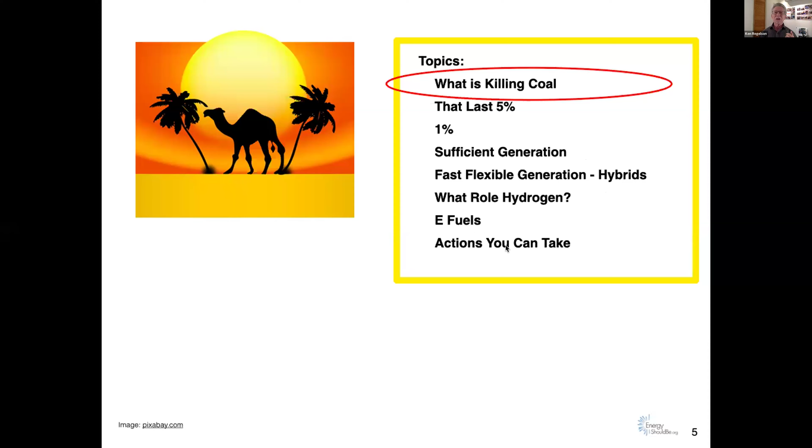Now, when I first started working full-time in renewables in 2001, coal was king, gas was queen, and honestly, 10% solar and wind electricity seemed practically impossible. Every now and again, somebody would say, oh, hey, when we get to be 100% renewables, and there'd be a long pause, and then everybody would laugh. That was 2001. In 2012, I created Energy Should Be to get the word out to people, to move people forward, and to look at this analysis question. And I put together a video that turns out to be our third most watched video. There's more than 12,000 views of this video. It's 3 minutes long, to allow lots of renewables. Baseload coal and nuclear must go.

Problem is, baseload power plants run like this. Renewables are like this. And if you're trying to back up something that's going like this with something that goes like this, it doesn't work.

It's now 2024, and coal is being killed by electricity markets where there's actual competition amongst generators, and lower cost combined cycle gas, and lower cost renewable electricity, and the fact that the price of gas went down, although it's probably not low right now.

So let's talk a little bit more about coal, nuclear, and to a lesser extent, combined cycle gas. Combined cycle gas is a gas plant that runs a little bit like a coal and nuclear power plant, but not quite as slow. So they don't work well with renewables. I already talked about that. We'll talk a little bit more about that later.

They have a high minimum run. That means you can't turn them down to way low. If zero is the baseline, you can only turn them down maybe to 50% or maybe even 60% of their full capacity. They aren't very flexible. They can move a little bit, but they can't move a lot, and they can't move quickly.

In the case of coal and nuclear, it's 3 or 4 days of start time. It takes a long time for them to get going and a long time to shut down. In the case of a combined cycle gas plant, it's a slow start. It might take 12 hours or more to get up to speed after generation.

Coal and nuclear are very high capital costs. And what's more, it's not just that - they're very high cost unless they're run most of the time. If they're running at 80 or 90% of the year, then they're not so bad. Part of that's capital costs, the cost of building them, and the cost that we pay off to Xcel for running them. If you don't have lots and lots of megawatt hours in the year, a way of measuring electricity, you're spreading out this big cost over a small number. That makes that cost higher.

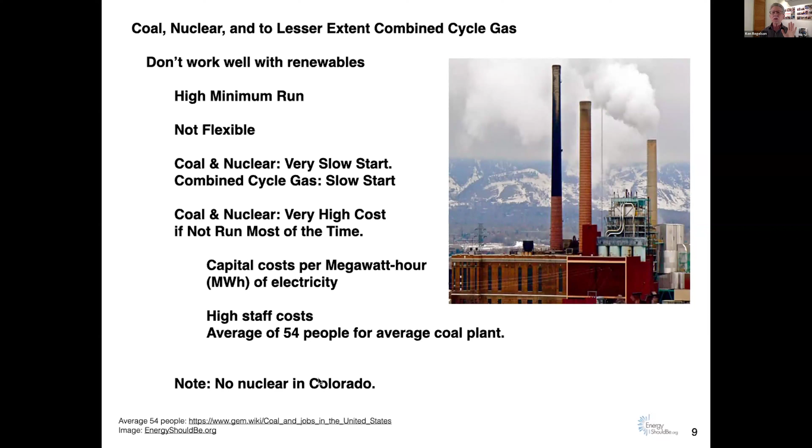This is really critical, and it doesn't just apply to coal and nuclear. It applies to combined cycle plants - if you don't run them a lot, they're not cost effective, although with combined cycle you might need only 1 or 2 staff people to run them. But it might also apply to geothermal, very high upfront cost and not very good at moving up and down, or small modular nuclear reactors might have the same issue.

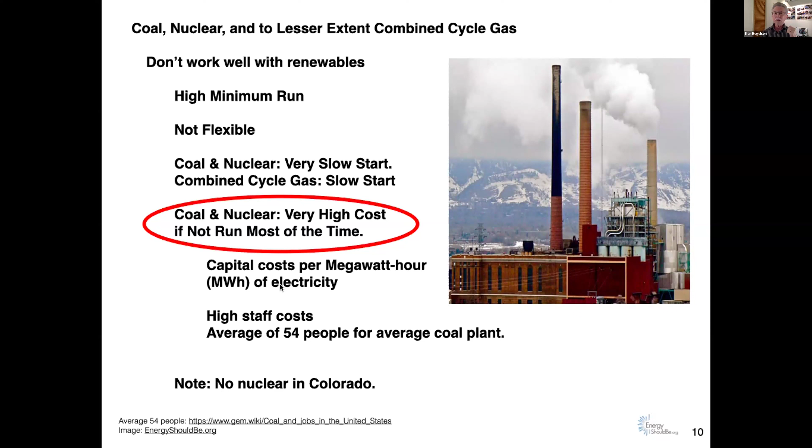Ask me questions at the end for more detail.

With apologies to W.C. Fields, the actor - he actually said what the world really needs is a cheap 5-cent cigar. Well, I don't smoke and don't believe in it, but hey, I get the point. What the world really needs, this is me saying, is a good, cheap, medium start, somewhat flexible and reliable generator.

Let's talk about above 95%. Now, these slides are from a talk I gave, I think maybe even to Power Our Future in 2019, and it talks about what happens when we model lots of reliability and how we get above this level.

So first, the story that goes behind this. Now, dark calms - what are those? That's when there's no sun and there's no wind, or little sun and little wind. And we want to be able to have electricity at okay cost. So we took actual data from Platte River Power Authority. That's an electric utility that serves 4 northern Colorado cities with generation and transmission.

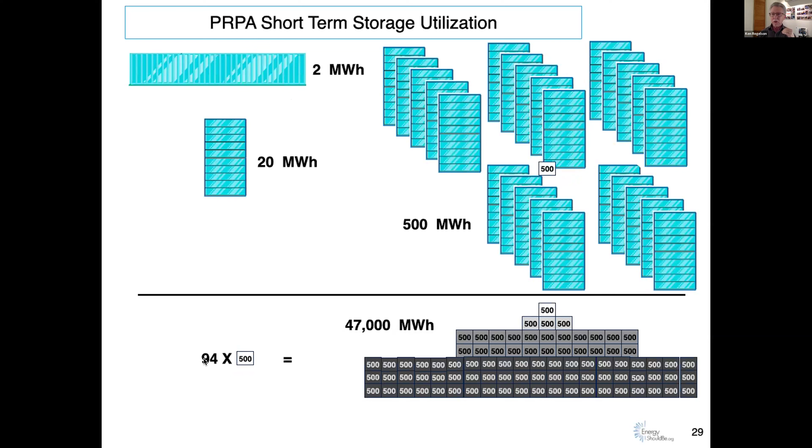Here is a storage container, a shipping container. It turns out if you take a shipping container and fill it full of batteries, right now you get about 2 megawatt hours. It's going up, maybe it'll get to 3 or 4 at some point in time. There's 2 megawatt hours, there's 20 megawatt hours, there's 500 megawatt hours. Okay, imagine this times 94, and I think you start to see the problem with this.

What about 1%? What is 1%? 1% of a year is about 100 hours. For those of you that are literal, it's a little less than that, about 4 days. 1%, well, that's the distance from here to here.

99% to 100% renewables. Form Energy's definition of long duration storage, interestingly, is 100 hours, 1%. And they did that by getting lots of utility data and figuring out how much storage you really need to have very high levels of renewables.

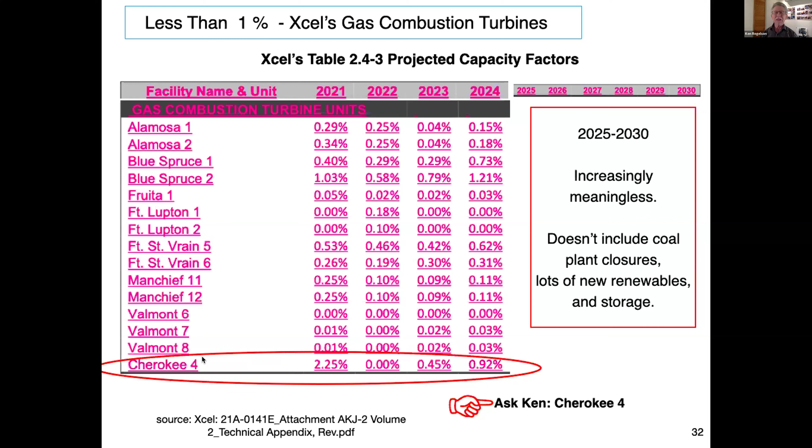There was one other little point. There's one of these that doesn't belong - Cherokee 4 is not a combustion turbine. Well, sort of. It's a long story, if you have a question about it, ask me at the end. It's kind of an interesting story, I think, but I'm a geek. What can you say?

Okay, so we know what 1% is about, but something we don't want is this: renewables and storage push fossils to 1% and less. Even if you're at 80%, you're heading down a different level, 17% down, and then you add a little more storage, a little more demand management, some more renewables, maybe markets help you out, you're going to be getting closer and closer to 1% not renewable.

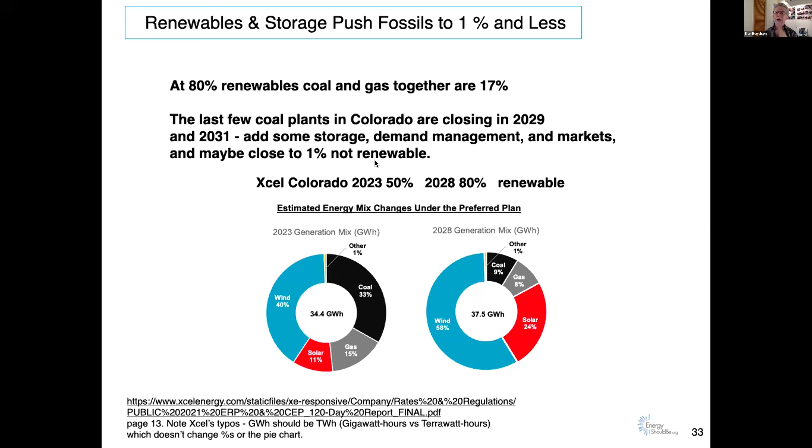What about another side of 1%? A 100-hour blackout is not acceptable, particularly if it happens during a 110-degree heat wave or a minus 10 degree cold snap. Picture the last several days in Colorado with no heat, no light, and if we electrify it, no transportation. People die, and our economy literally stops. You can't buy anything during a blackout. Everything relies on electricity. That's not acceptable. Maybe an hour is acceptable, but not 100 hours.

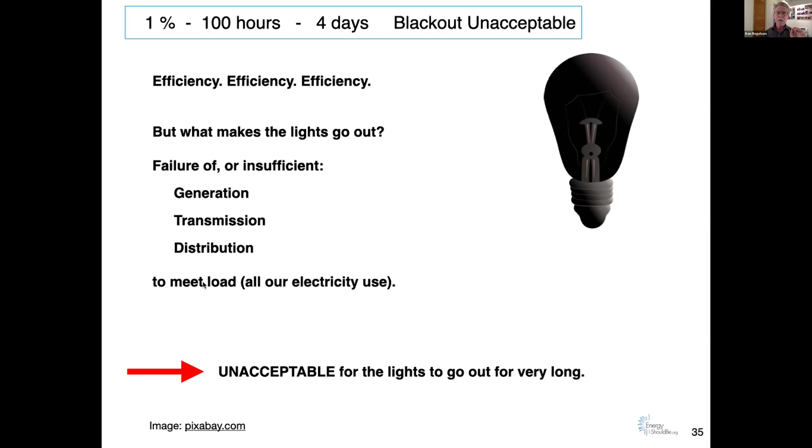So how are we going to fix that? Efficiency, efficiency, efficiency - I've said it, I've mentioned this in every talk, and people say why don't you talk more about efficiency? Absolutely, efficiency. What makes the lights go out from the generation side, from the grid side? It's failure, like a mechanical failure, or insufficient planning for generation, transmission, and distribution to meet our load. Load is all the ways that we use electricity at this moment - that's the electricity load. And I'm mostly going to talk about generation.

So let's talk about sufficient generation. These next two slides are actually from a talk I created back in 2012. Enough generation to keep the lights on 99.99% - that's 1 hour blackout plus 20%. And that's because if you're an electric utility, your neighbor may fail and you need to be able to help them. That's part of the way that we get to this lower level, 99.99%. Up until recently, as I said before, that meant baseload - coal, nuclear, gas for running like baseload or sort of like baseload, like a combined cycle, and peaking gas.

And that looks like this. This is, by the way, actual data from 2010 for Boulder, Colorado. This shows a fair share of baseload coal, no nuclear in Colorado, and peaking natural gas to fill in. That's what it looked like in 2010.

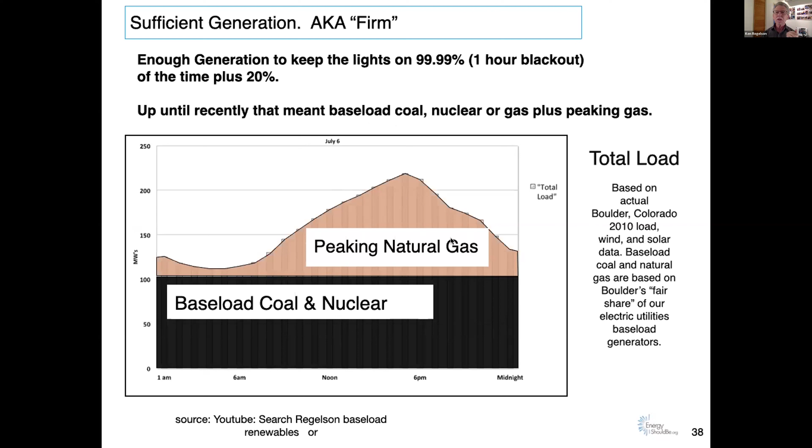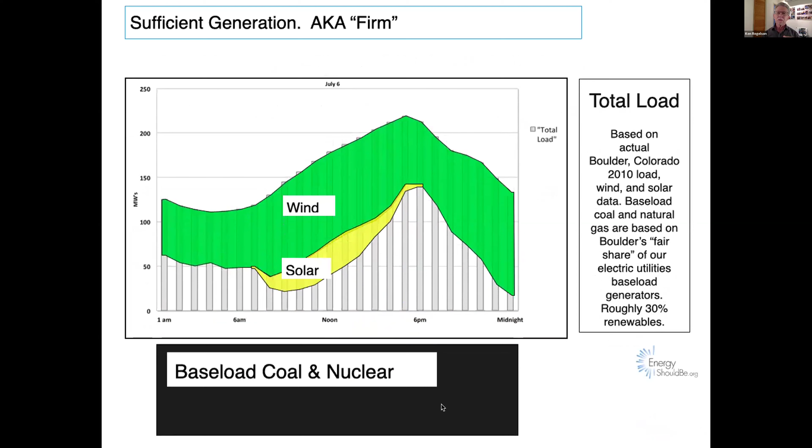But if we add wind and solar to even just 30%, never mind 50%, the wind looks like this, the solar might look like this. There's no place for a big rectangle. If you try to put in baseload coal and nuclear, it just doesn't work. You have to go to something that's very nimble, going up and down, like a peaking gas plant.

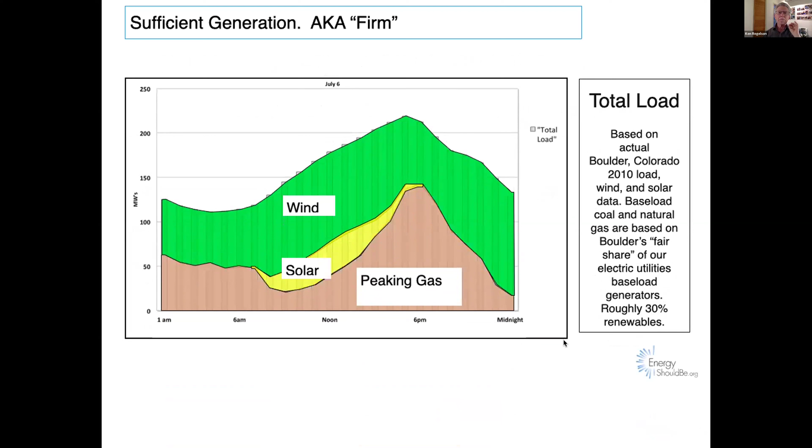Okay, I think very soon, sufficient generation is going to mean for utilities: renewables everywhere, storage everywhere, distributed energy resources down in our buildings, on our homes and businesses, solar storage and load management so we can turn down the load when we don't need to use it, so we can keep air conditioning and heating running, and transportation. Virtual power plants - these are all great things and they are coming. Managed electric vehicle charging, and part of that could be V2G, where not just charging the vehicle, but the vehicle helps support the grid by exporting electricity to the grid, and continued backup support from neighboring utilities, maybe through larger market areas.

And even with all of that, we may still be faced with a 1% shortfall. Two choices: we can ignore it and say 1% fossil's okay, or maybe we can do something else, and maybe there's some things we can learn about doing something else. That's the rest of this talk, most of the rest of this talk.

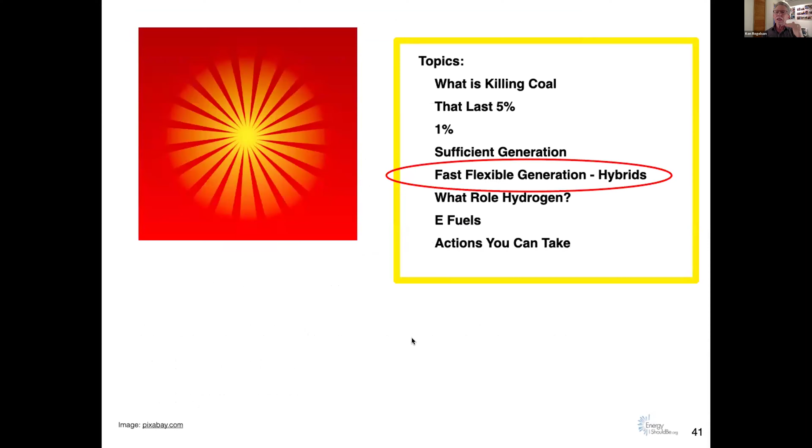Okay, one of the things we can do is to take things that are less efficient than they could be and make them more efficient with flexible generation and hybrids. Platte River Power Authority, Northern Colorado - their plan is to get to 88% renewables by 2030.

Not as much as we might like, but it's still a good big step. They say they need a 200 megawatt, $240 million aeroderivative gas turbine. They're going to close their 280 megawatt coal plant, that's why they need this additional capacity, plus more wind and solar distributed energy resources. They want firm, fast, flexible, fast start, low minimum capacity replacement for the coal capacity, and by the way, highly efficient.

Okay, I agree with the first five. And I wonder why highly efficient matters as we move from 12, then down to 5, and then down to 1% non-renewables. Efficiency doesn't matter so much if you're just going to run it for 1% of the year.

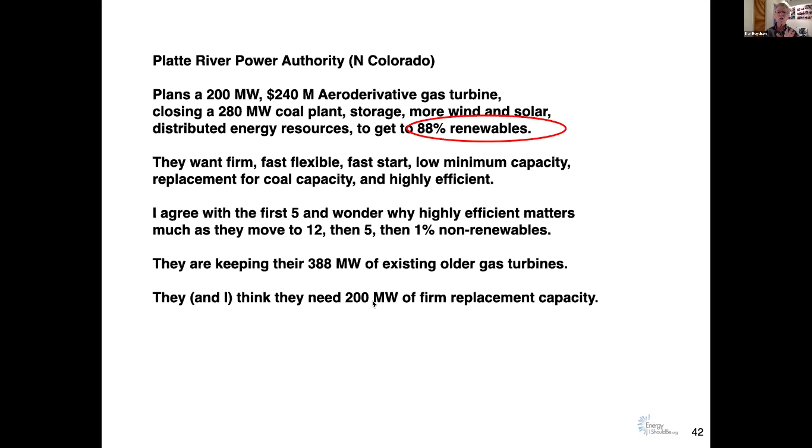They are keeping 388 megawatts of existing gas turbines. And I agree, they need 200 megawatts of firm capacity somehow. But there are lots of ways to get that, not just an aeroderivative turbine. Okay, firm, fast, flexible, fast start, low minimum capacity.

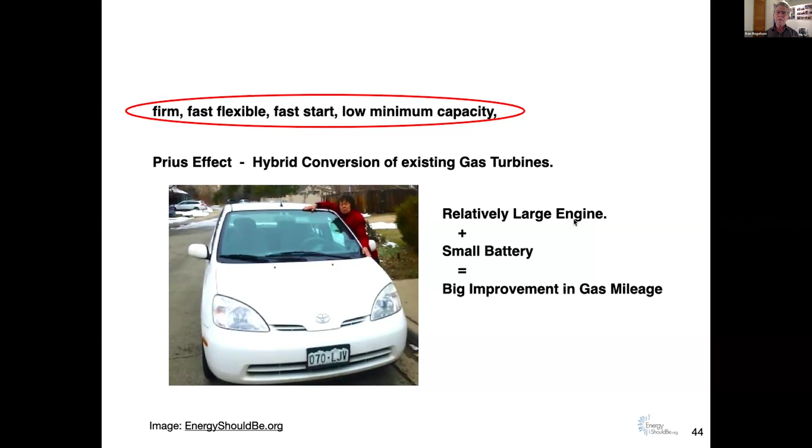Priuses. The Prius was an amazing innovation when it first came out back in 2000 or 2001. It has a relatively large gasoline engine in comparison to a very small battery. Actually, in comparison to bigger cars, it does not have as big a gas engine as them, but in comparison to the battery that's in it, that helps move the car—not the battery just for lights, but that actually helps move the car—it's a pretty small battery. And that got a big improvement in gas mileage and a big reduction in pollution.

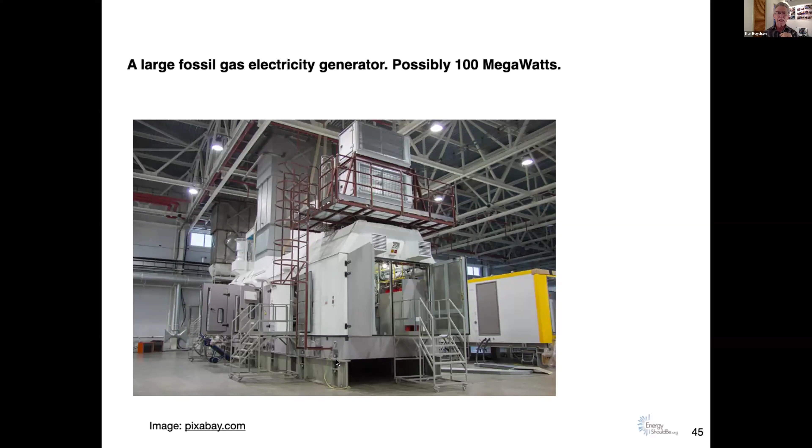What if we did that with this? This is probably maybe a 100 megawatt natural gas electricity generating turbine, a peaking unit, one that can vary very quickly. That's what it looks like. You can tell from the steps, it's not giant. That's a lot of generation in a pretty small space in comparison to, like, a coal-fired power plant.

Because you get firm, reliable, dispatchable better than the existing turbine. Okay, and why? Well, that's because you can run the turbine, or just the storage, or just the turbine, or you can run both at the same time, and you can switch on the fly. The battery gives it super fast and flexible capability. It's cheaper to maintain. Black start capability, that's something that a lot of power plants don't have, and with hybrid systems, you can add in black start pretty inexpensively. Spinning reserves with a lot less spin, and pretty inexpensive, $15 million for a 50 megawatt CT. That's a lot of money if it was me, but in utility speak, that's not much. Think of them as firm spinning reserves with 90% less spin.

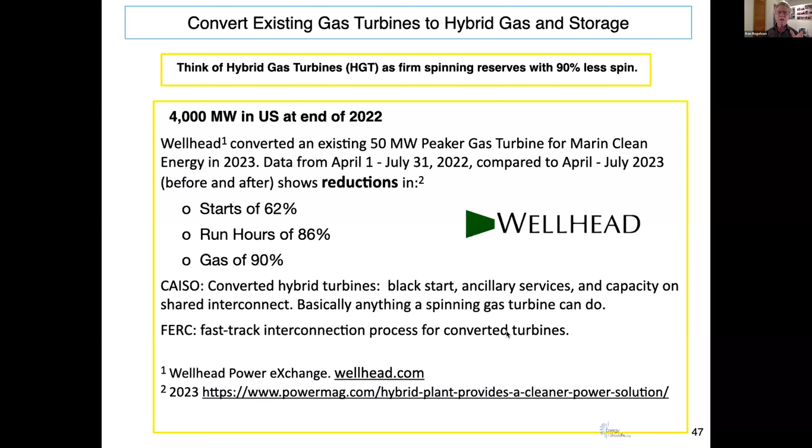CAISO is California's grid operator. They say—not just me saying this or Wellhead saying—they say that all these things, black start, ancillary services, capacity on a shared interconnect, anything a spinning gas turbine can do, these can do with very little spin. FERC, the Federal Energy Regulatory Commission, that regulates electric utilities on the US national level, said you can use a fast track interconnection process for converted turbines. These are available not just from Wellhead, they're available from GE and Mitsubishi as well.

There's a report. If you want the link, then Mary or I can get it to you. Just send an email, you'll have my address, you probably have Mary's already. That helps the more technical people understand really what's going on here. So we'll see about that for a little bit later. So, firm.

Okay, what role does hydrogen play? These slides are brand new, some of them literally from this morning. I wish I could say that I was more prepared all the time.

Why am I talking about this? Because a lot of people talk about hydrogen for aviation fuel. I don't think it's going to happen. Maybe I'm wrong. You tell me what you think after you see this.

Take the 787, nice modern jet, 250 passengers. Turns out it's not that hard to find out the passenger cabin volume: 16,000 cubic feet. If you took the entire passenger cabin and made it a big tank, it would be about 120,000 gallons. There's 5,000 feet in the cargo volume, and they use 34,000 gallons of jet fuel. They get filled up with that.

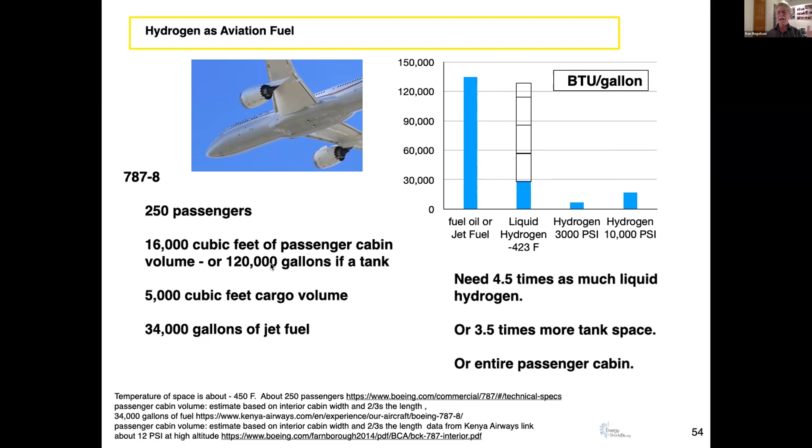It doesn't happen, not directly as hydrogen. That means to have the same amount of energy, you have to have 4.5 tanks the size of the 34,000 gallon tank, which is conveniently just about the entire passenger cabin. So if you want to fuel this plane with hydrogen the way it stands, no passengers, no problem. Well, maybe a little problem.

What about pipelines and storage? Let's talk about realistic uses, because I think there are some. It's these super cold liquids, like liquefied natural gas, that are really hard to cope with. You constantly have to cool them in order to keep them a liquid. They want to boil off, and that means you're losing that liquid. And we're talking about using it 1% of the year here, right? I'm sorry, I'm getting ahead of myself - this is for aviation. You can use a lot more than that.

Pipelines need 4.5 times the capacity, either pressure, diameter, or both. There are environmental issues - this is a study from the UK, there's a link down here, and the slides will be available to you too. That said, the leakage of hydrogen will increase the atmospheric lifetime of methane. We don't want that. Where is it good to be used for? Well, when it's being used to produce - using electricity as the fundamental, but make the hydrogen with electricity that's generated renewably - for steel, for making cement, or for making e-fuels, like maybe jet fuel.

This is a quote from Leslie: physics, including thermodynamics, always wins, but sadly, it never votes or gets elected. And that's why we're seeing so many people talk about hydrogen for things that are unrealistic for it.

Here's the rest of the aviation fuel alternatives. Anything below the red line is just too energy-undense. It's not dense enough to be replacing jet fuel in most jets as we think of them now. Maybe someday somebody will figure something different. LNG is a liquid fuel, and the tanks are just too heavy and expensive to make any sense. Make an e-jet fuel instead. Propane has its problems, and ethanol too. If you want to know, ask.

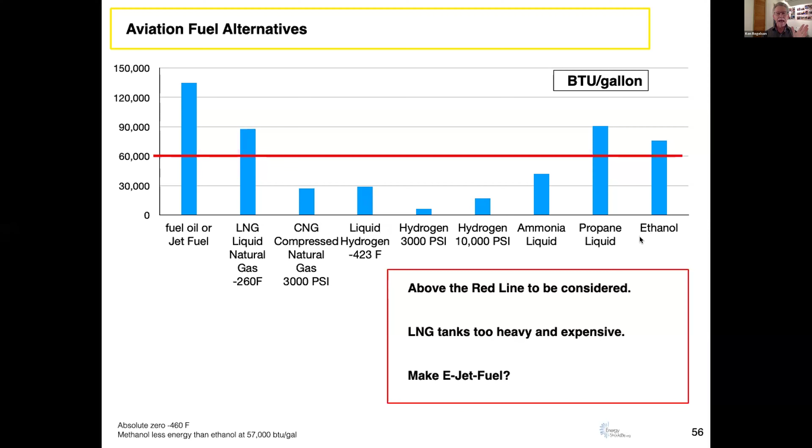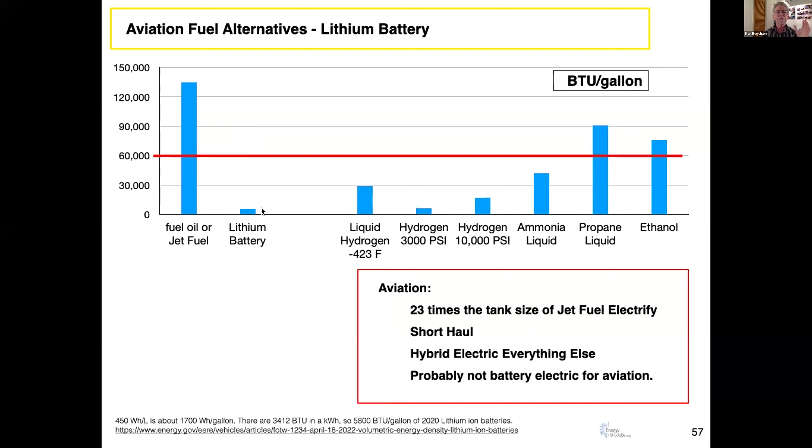Okay, what about if we used lithium batteries? Never mind the weight, just the volume of them, how much space they take up. Well, turns out it's about 5,000 BTUs per gallon - just a fraction of this. You have to have a tank that's 23 times as large as the tank that you would need to fuel an airplane this way.

I do think that for short haul airplanes, electricity will see use there. And I also think we should hybridize all the rest of the fleet eventually—it'll make a great deal of sense, just like it makes sense to hybridize a Prius.

Let's talk about 1% electricity fuel alternatives. These gas turbines, thousands of them worldwide, burn fossil gas mostly. Some burn fuel oil—remember, that's just like jet fuel. Many are dual fuel already, and almost all can be converted to dual fuel or just fuel oil, particularly if it's a renewable e-fuel, with minor modification. Tank size doesn't matter quite as much.

So that's not an issue. But even so, if you have a 100 megawatt gas turbine, that's going to burn 500,000 to about 1 million gallons of fuel in 100 hours, or 1%. And Colorado might need 50 to 100 of these.

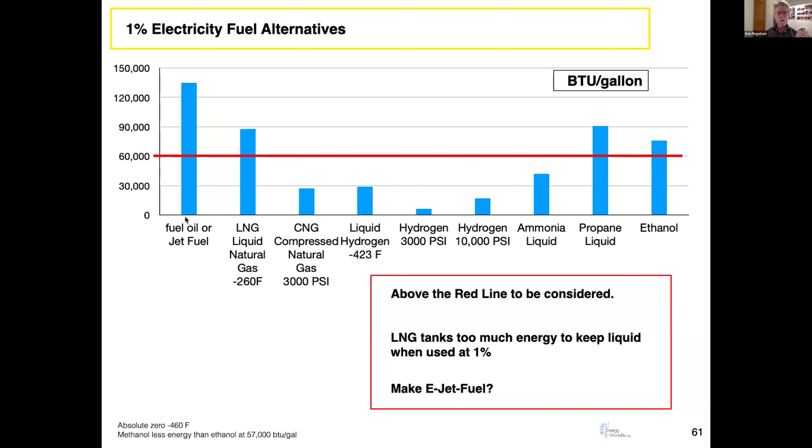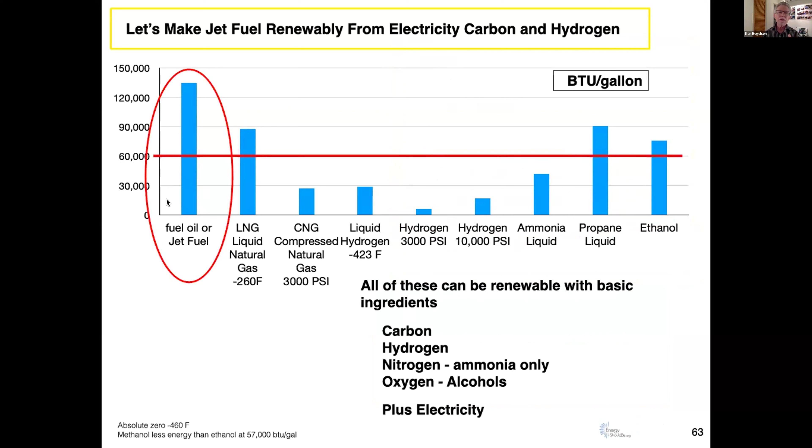So let's talk about e-fuels—yeah, we started over here. What does it take to make this? Actually, all of these can be made with carbon and hydrogen. In the case of ammonia, nitrogen and hydrogen; oxygen for the alcohols; and finally, electricity to make all of this work. This is, I think, what's going to happen.

Okay, how do you make it? Mostly carbon, hydrogen, electricity—they're long chain hydrocarbons, hydrogen and carbon. Where are we going to get the carbon from? Well, we can do CO2 air capture, except it's hard, which means expensive, and takes lots of energy. It's measured in parts per million—that's why it's hard, there's so little of it in a giant quantity of air.

But hey, fermentation generates almost a pure stream of CO2—pretty easy to capture, but is there enough? I don't know. Carbon from biochar.

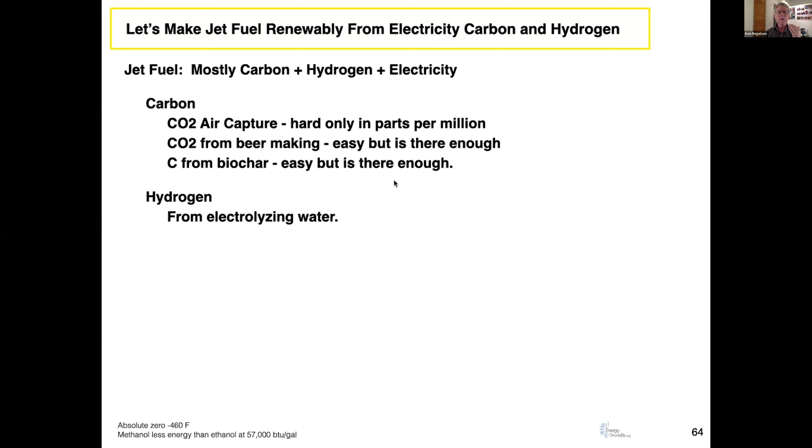Easy to create. Wood chips—when there's a spring snowstorm and all the branches drop, and the cities collect up all the wood and chip it up, that can easily be made into biochar. I don't know if the cities have that many wood chips that we could do that with, but there are other places we can get biochar from. And the hydrogen, of course, from electrolyzing water.

We're coming down to the end here. I know I'm going to run just a few minutes over my—oh no, actually I'm not running over, because we didn't start right at the head of the hour.

Okay, so let's talk about these two industries, aviation and electricity. Aviation—it turns out we know how much jet fuel they use per year in quadrillion BTUs. This is a pretty easy number to look up. They use 2 quads, a giant amount of energy. 1% of all the electricity, just for the United States, is just a third of a quad.

So aviation uses 6 times as much fuel as 1% electricity, if we were just using jet fuel or fuel oil, which is very like it. There's some other things we know about these industries. The aviation industry has thousands of existing planes that are jet fueled, but if you change to something else, you may have to change the plane significantly. It's wildly competitive, very innovative, very price conscious—that's why they're competitive. And safety and reliability are absolutely critical, like the electric industry, where reliability and safety are also critical.

There are thousands of existing generators in the electric industry that can be jet fueled. They are a monopoly—they don't have competition. There's minimal innovation, and honestly that's not necessarily a knock on the utilities. To keep the lights on, I want minimal innovation. Yet somehow the aviation industry manages to innovate pretty well and keep the planes pretty darn safe.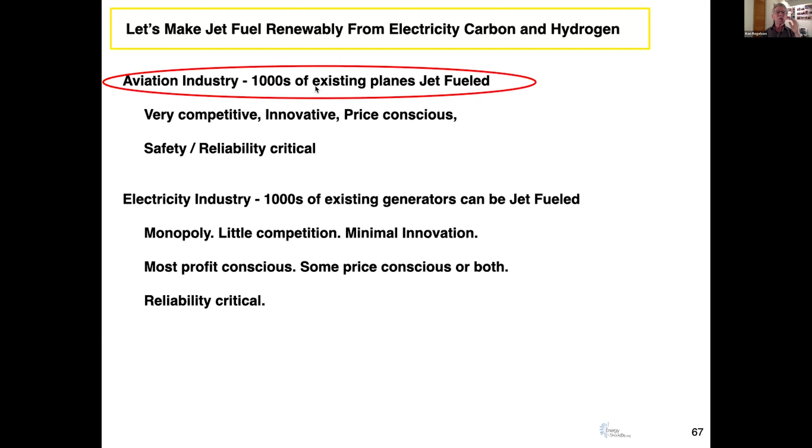Most utilities are profit conscious, not necessarily price conscious. Some are price conscious, or both profit and price conscious. Okay, if I'm putting my money on something, I'm going to go with the one that's using 6 times the amount of fuel, because it's a bigger market and is wildly innovative—there it is, the aviation industry. Let's do what they're going to do. They need jet fuel, they know it. Sustainable aviation fuel—we need to get it to be an e-fuel that's fully renewable.

Okay, actions you can take. I love this quote: 3 in 4 say they'd prefer to date an electric vehicle owner. That came from a survey that Ford did as they were introducing their electric vehicles.

If you don't already own a plug-in vehicle and you can afford it, you should buy one. There are lots available used now for reasonable money. The reason isn't because your 10-year-old car needs replacing right now, it's because people do what their neighbors do. Even people who disagree with each other politically eventually get sold on the idea by what their neighbors are doing.

If you have an existing home, or even if you rent, you can get an energy audit. That should include a blower door test, infrared camera pictures, and a report listing cost-effective measures. Do the cost-effective measures. Most of those are about energy efficiency. Keeping your house warmer will make it more comfortable and better value to sell or own.

If you're a renter, get the report. Sometimes they're even free from the electric utilities. Get the report and show your landlord and say, look, I'm signed up for a year, let's do a cost share. The computed savings, I'm willing to have half of that added to my rent.

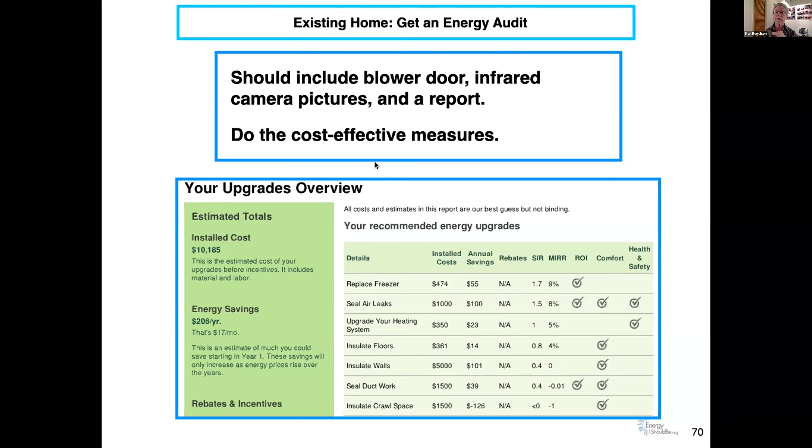See what they say. Remove the gas meter. Your hot water heater isn't such a big step, just replace it with an electric hot water heater or a heat pump, either way. But space heat is tough in our climate. Space heat with heat pumps is possible if you can afford it, or for new construction do a ground or geothermal heat pump, same thing. If you have an existing home, you can still do an air heat pump.

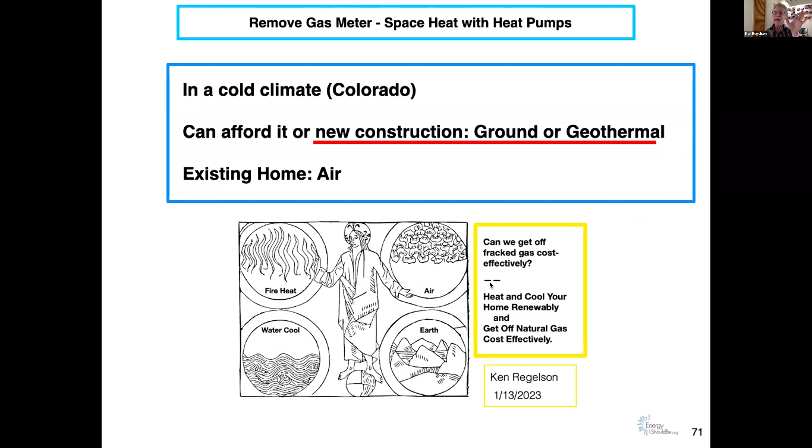I did a talk on this, and we can get you the link to the most recent one. I did this for Empower Our Future back in December of the year before last. Then in January I did it for another group and actually had data from the cold snap that occurred in December of 2022. Let's review.

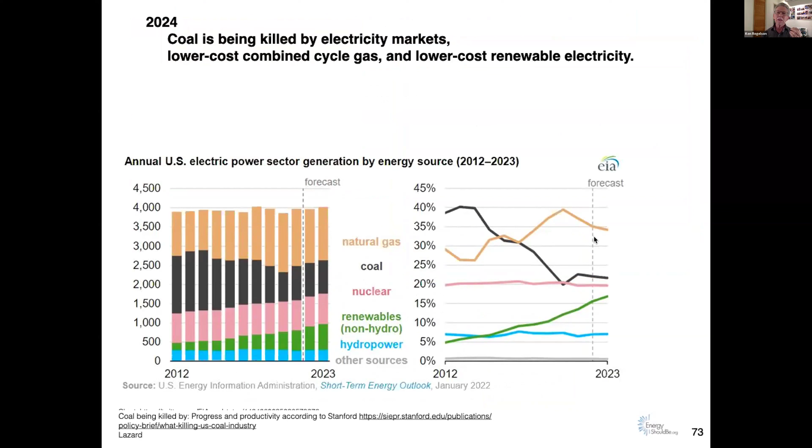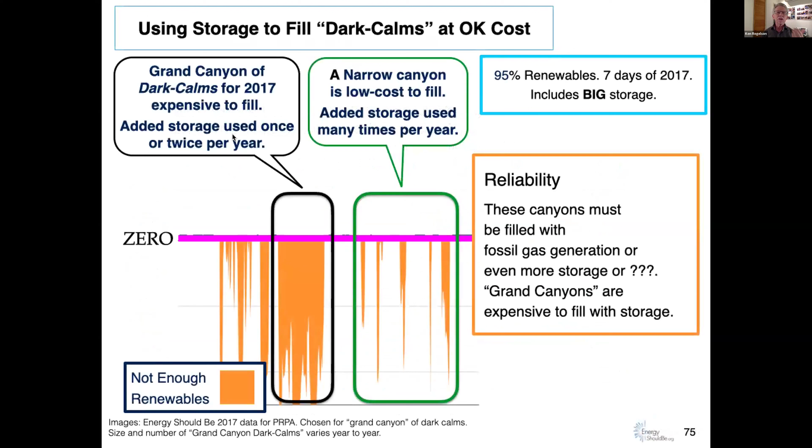Coal is being killed mostly by natural gas, by combined cycle gas plants up to here, and then increasingly being killed and kept killed by cheap renewables. It happened because of cost. We need firm generation that isn't super expensive, it doesn't have to be super flexible. We need to fill the dark calms at an okay cost. There's a sweet spot here, but this is kind of impossible.

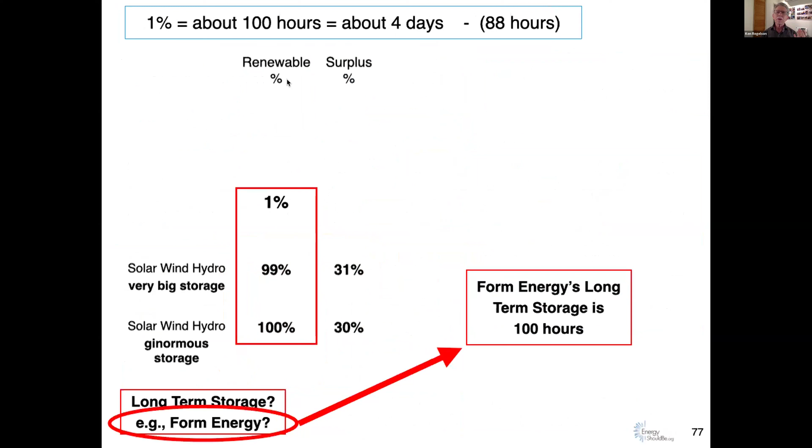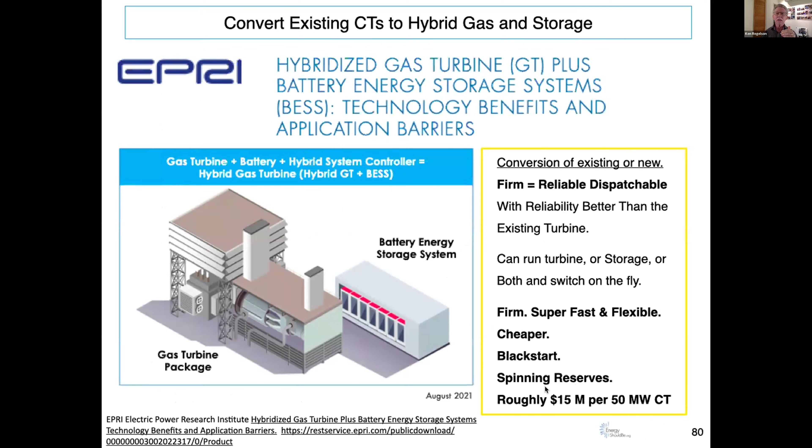That 1% — what that means is a 1% blackout is not okay, but a 0.01%, one-hour blackout is okay. We know what sufficient generation means: it means renewables everywhere, storage everywhere. We know we can get better use of our gas turbines as they stand, for a much better price than buying them new. Buying them new would probably be four or five times the cost of doing the conversion.

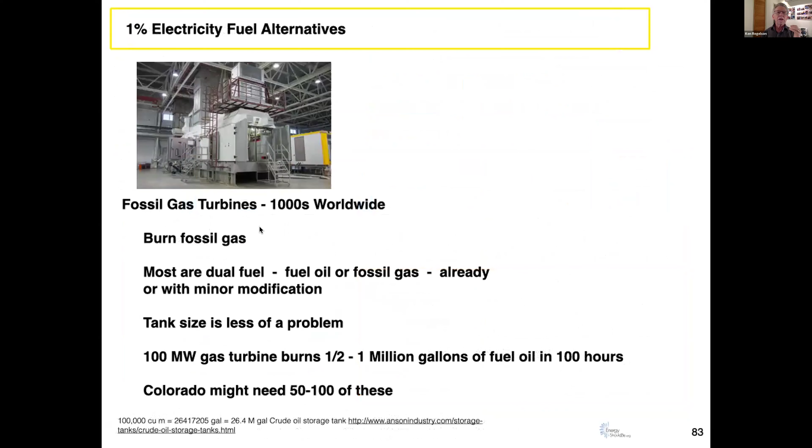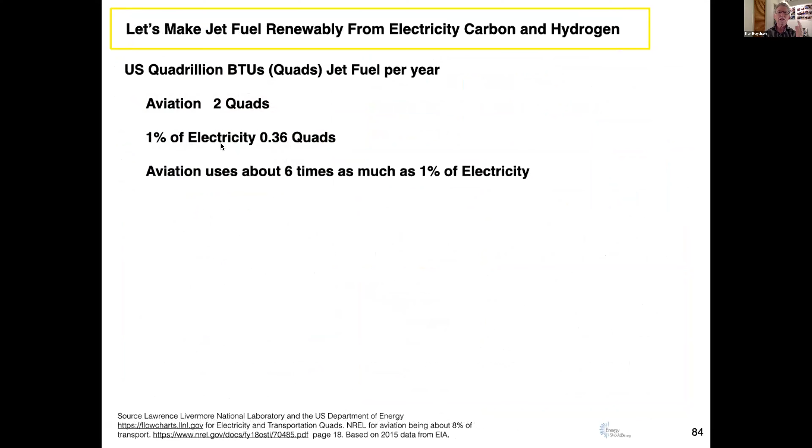We know that hydrogen isn't going to work as an aviation fuel, and neither is battery storage. Hydrogen is not such a good choice for 1% electricity either. We know a lot about the aviation industry versus the electricity industry at that 1% level, and it makes a lot more sense to hitch our star to the competitive industry. And we know some things we can do for our own homes.

There are so many people I should thank for this talk, I'm going to just pick a couple. Leslie Glustrom, for so much. One of the big things for everything I've talked about for the last 10 years is modeling. Leslie was the first person who said there are smart people in Boulder, some of them are pretty smart anyway, and that we can do the modeling ourselves.

Ron Sinton, who said that the sun doesn't stop shining at noon. That's actually the name of his comments to the Public Utility Commission on the clean energy plan, which you can still make comments on. Ask me about that if you'd like.

Lyle Rupert came on the scene about three years ago. He's been pulling data down from Platte River Power Authority so we could see hourly data, they know about it, it's totally okay by them, and doing very interesting, thoughtful analysis of how he looks at the world and energy. By the way, in the daytime he's an aerospace engineer.

Mary Pettigrew for hosting this for so many years, and all of the Empower Our Future team. Mary also helped create the energyshouldbe.org logo for me, oh gosh, 12 years ago.

Glenn Crummell is a good friend. Oh, by the way, Mary's a dancer, so is Glenn. Occasionally, Ron has been known to show up dancing.